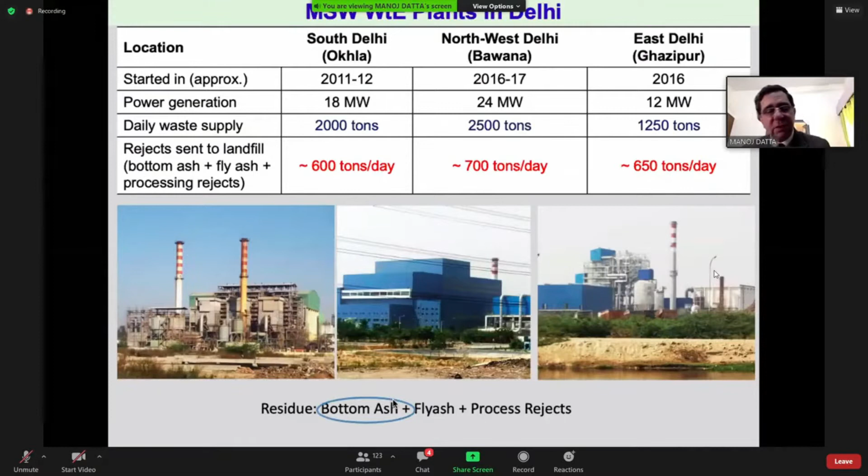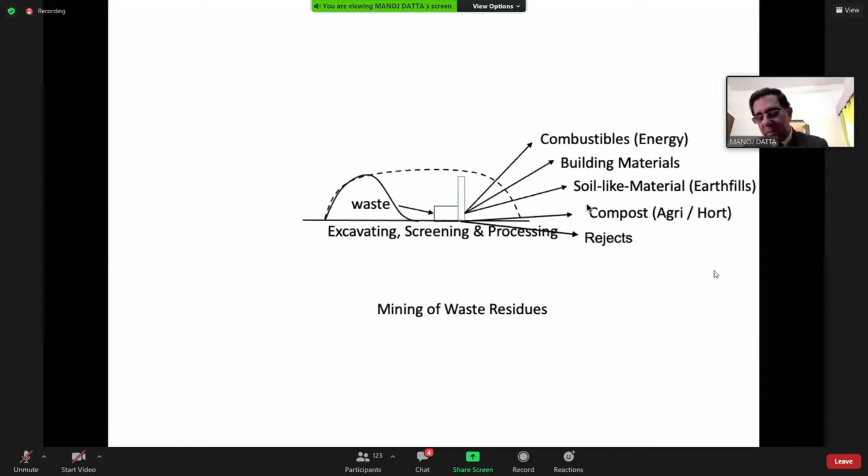The philosophy is that if you have a waste dump, and if you can excavate, screen and process the waste, you can recover combustibles, building materials, and rejects. So the focus in geotechnical engineering is, can I use the soil-like material for the purpose of earth filling? So bulk reuse of soil-like material as well as the waste-to-energy ash, which is now coming out in huge quantities, is the focus of this paper.

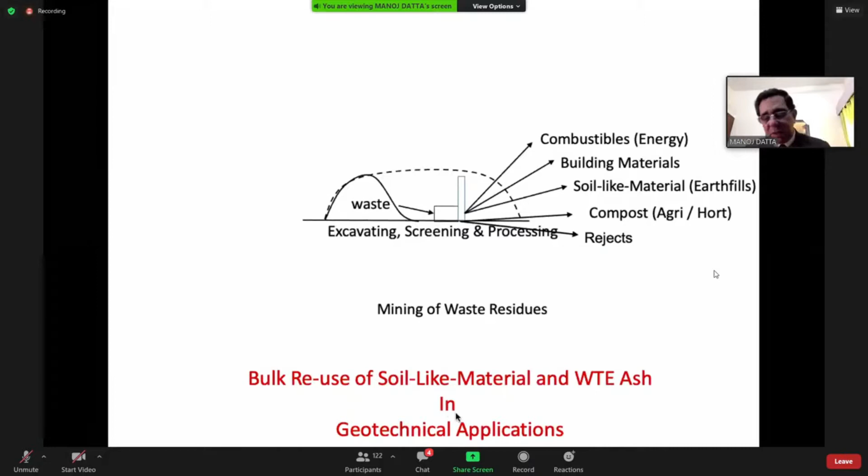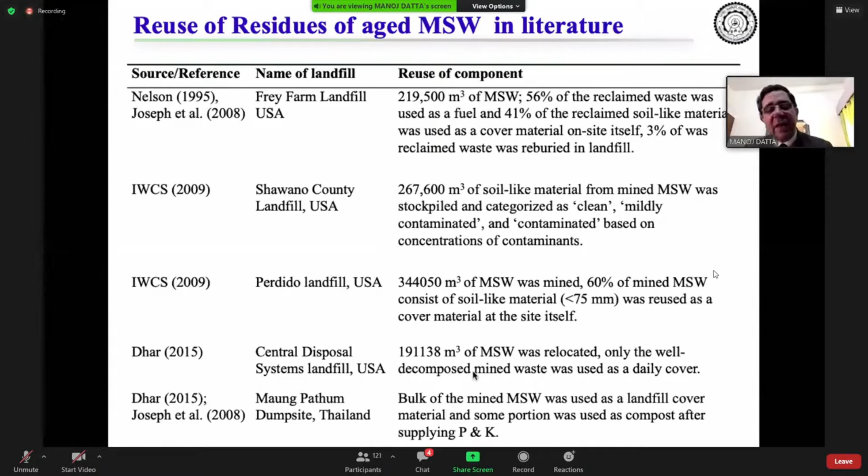First, we will look at soil-like materials. And what we find is that if you look at the literature, most of the soil-like materials which have been excavated and segregated have been used at the landfill site itself for the purpose of a daily cover or the final cover of the landfill.

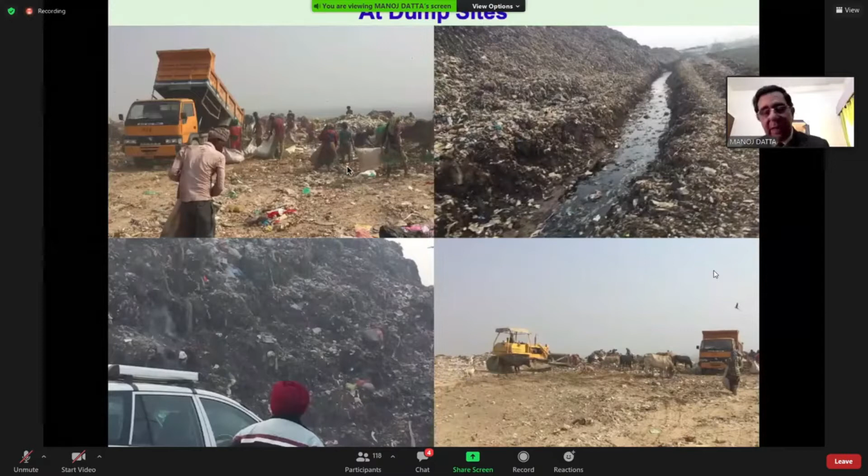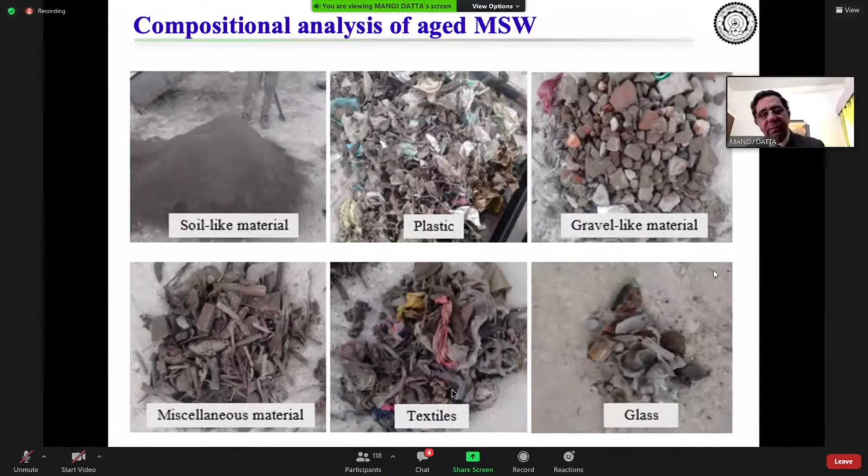So what we did was we collected waste from all three dumps and screened it, and looked at their visual composition. Bulk of the material is soil-like, some of it was gravel-like, and other minor components. If you look at the material passing 20 mm, 72 to 77% is soil-like or fine gravel. About 18% is C&D waste, which is greater than 20 mm, and the other things, combustibles and others, are in smaller quantity.

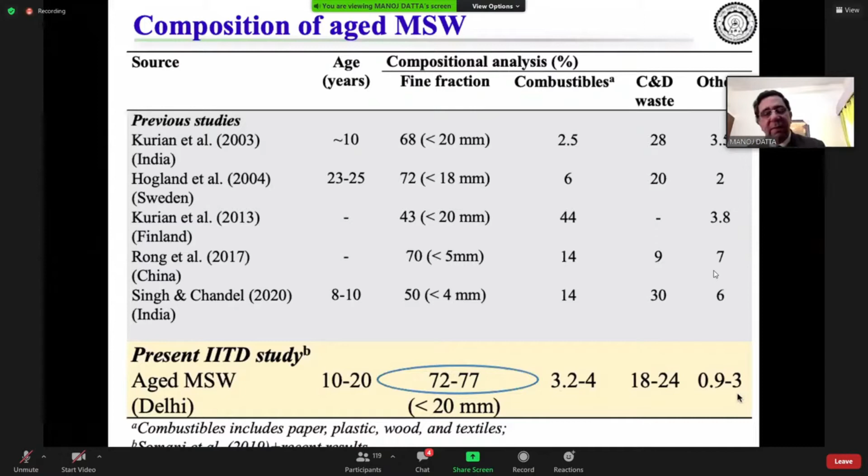And if I do a proper grain size distribution - that means washing to determine the amount of fines - then what we see is that 45 to 50% is in the sand size range, and 20% and above are in the silt plus clay size range.

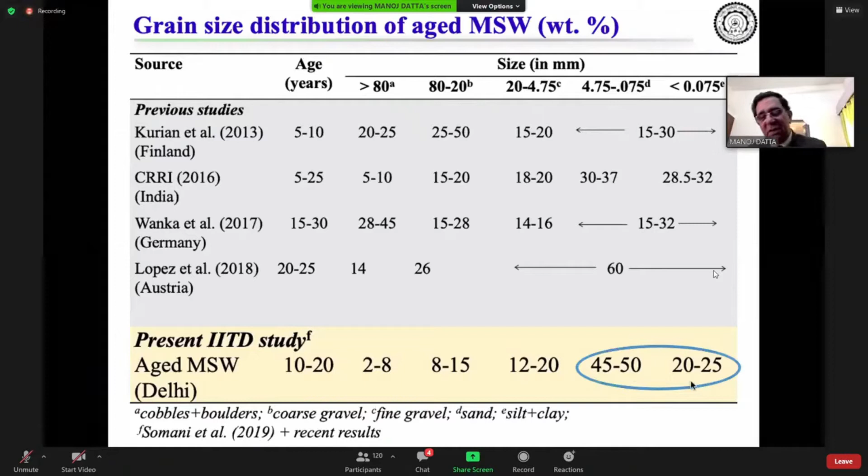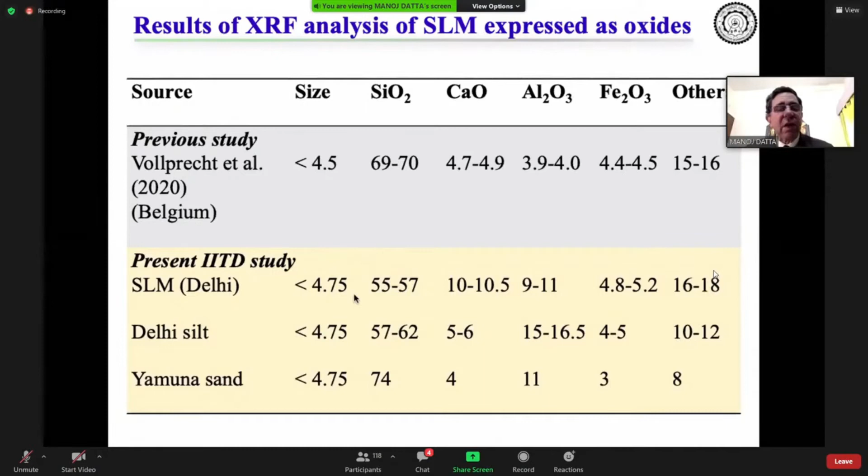And if I look at the major minerals - we are not trying to find all the minerals because the soil-like material is quite heterogeneous - what stands out from the soil-like material is quartz, calcite, and feldspar. And if I do the XRF studies, this is reinforced: you get SiO2 in large quantities, CaO, Al2O3, and Fe2O3.

As far as the C&D waste is concerned, it can be sent to the building materials waste processing unit, which is shown here. And as far as the plastics and textiles are concerned, they can be sent to the waste to energy plant.

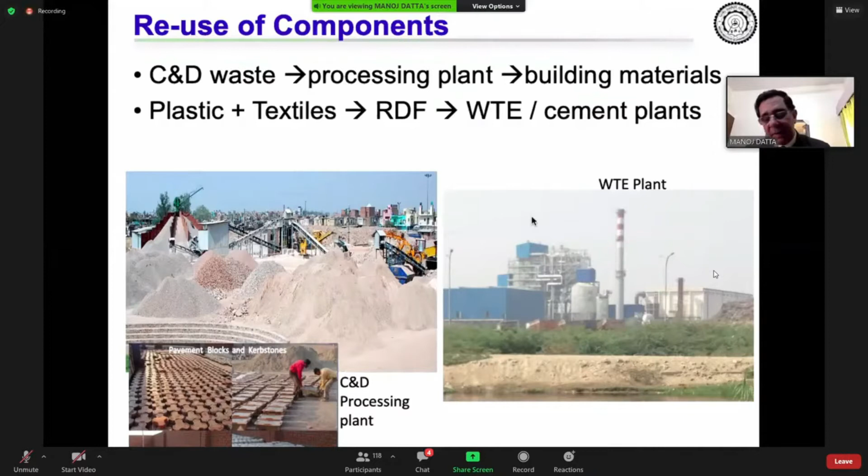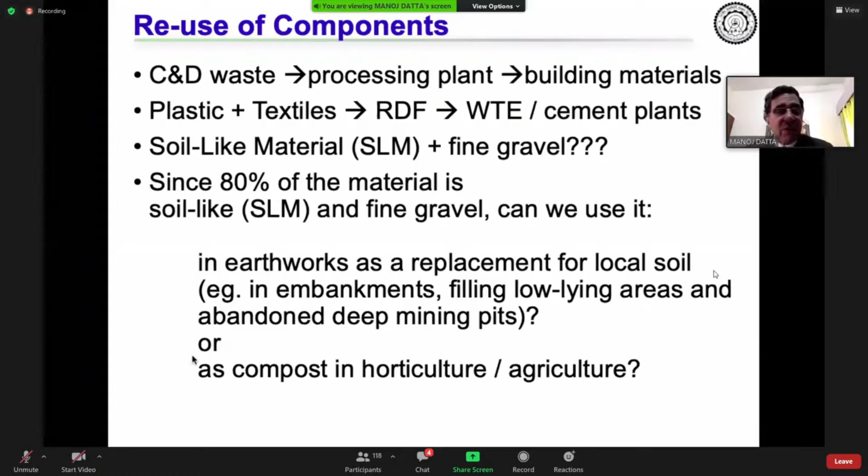But that still leaves us with about 80% material which is soil-like. So really the problem is not taking out the C&D waste and plastics and textiles, but to see what do we do with the 80% material. It is very attractive to say, can we use it in earthworks as a replacement for local soil? Or can we use it as compost in horticulture and agriculture?

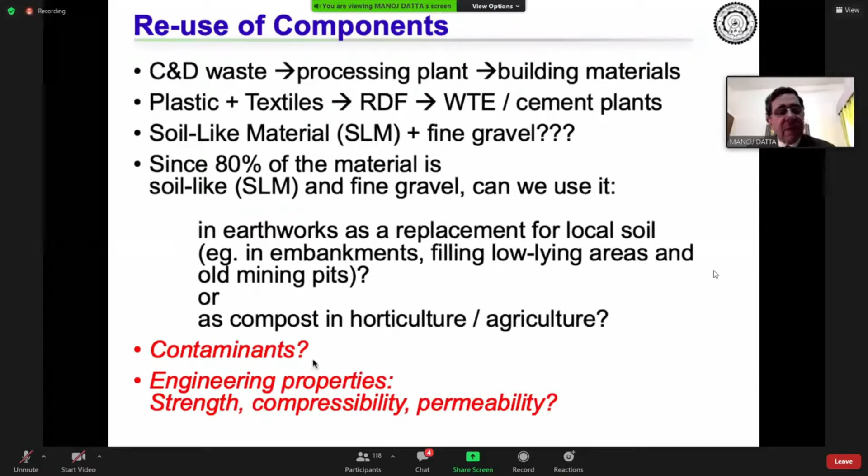So the immediate question which comes to our mind is, are there contaminants in it? And what are the engineering properties?

So the first question we'd like to address is: is the soil-like material hazardous? If you do the TCLP test, these are the results of the previous studies. Let me see if I can use the pointer better.

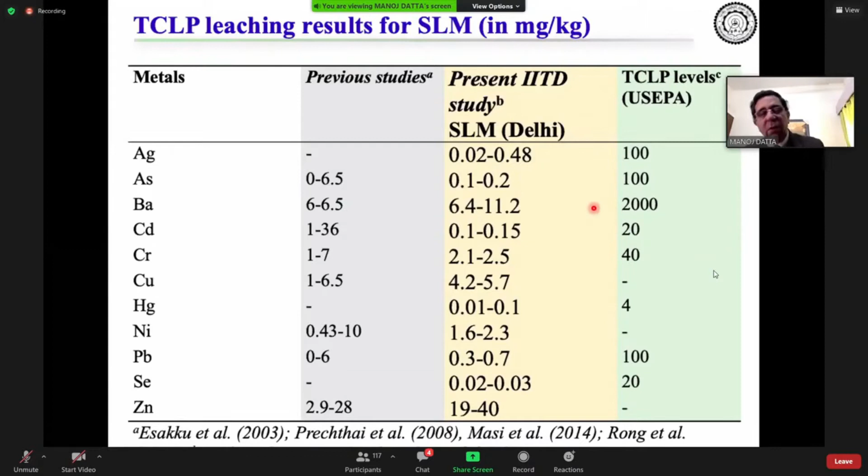These are the results of our current studies. It shows that almost all the heavy metals which come out are below the TCLP limits. So therefore, the statement which comes out in all the tests that is being done is that the soil-like material is not hazardous.

These mountains have 77% of soil-like material. Where has it come from? It has come in with the municipal solid waste, but quite clearly the silica matrix or the quartz matrix is coming in from the local soil.

So is the soil-like material similar to the local soil? That was our next attempt. What we find is that the soil-like material from these old waste dumps, which are 10 to 20 years old, the organic content is now 6 to 18%, but still substantial.

So we would like to recognize that when the MSW is put in these landfills, it probably has about 35 to 45% organic content and a lot more construction and demolition debris and soil, etc.

When you compare it with the local soil—when I am using local soil for Delhi, we are looking at Delhi silt and Yamuna sand—the organic content is 1 to 1.2. And if I want to use this material for the purpose of earth fills, the regulatory limits are mostly that organic content should be between 1 to 5% at max.

The other major difference is that the total soluble solids in the soil-like materials are very high. So I just want people to get an idea: this is 1.4 to 2%. The local soil has very little soluble solids, and these are primarily sulfates and chlorides.

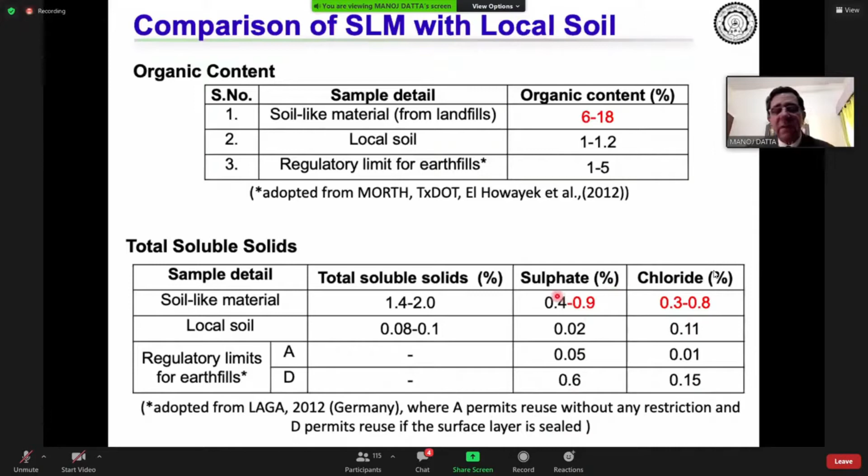There are some standards in Germany which say whether materials can be used without any restrictions or if they have to be used with sealing. So our chlorides and sulfates prevent unrestricted use of this material.

And if you pass water through the soil-like material—I would like to show you, this is silt, and we have transparent water, the silt has settled down. But if you pass water through all the 3 landfill materials, you will get this kind of water. So it releases color, and it is not that with one washing the color goes away. If I wash the soil 10 times with 10 times the volume, the color still comes out.

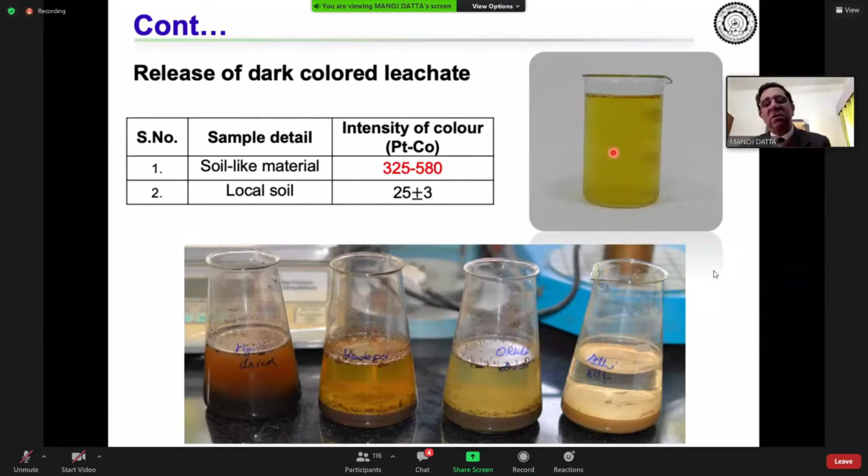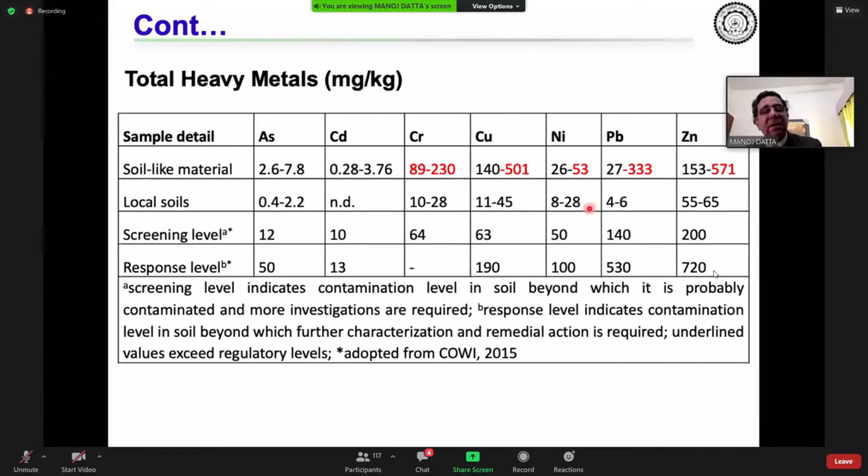And if I look at total heavy metals, though the material is not classified as hazardous as per TCLP procedures, chromium is elevated, 89 versus 10. Copper is elevated, nickel is elevated, lead is elevated. So really, while it's not hazardous, both the total heavy metals—which means we digest the entire solid matrix—as well as the leachable heavy metals, which is in water, are high.

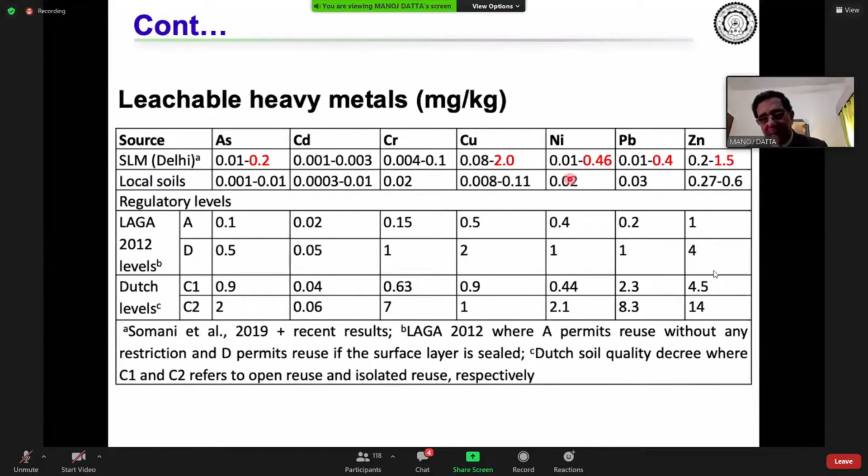So soil-like material is not similar to local soil either. It has higher organic content, higher total heavy metals and leachable heavy metals, very high soluble salts, and of course, leachable color.

Then is soil similar to compost? Because many people say that maybe we are looking at it wrongly. It has got high organic content, and from municipal solid waste by aerobic composting we get compost, and this is an anaerobic process, so maybe we can get compost. The only problem is that if the composting is done of mixed waste, you do get metals in it.

So we try to see this as well, and we find that the soil-like material—these are the compost standards of India.

How much organic carbon, total nitrogen, total phosphorus, and total potassium should be there. And we find that organic carbon is a little low. NPK is about all right.

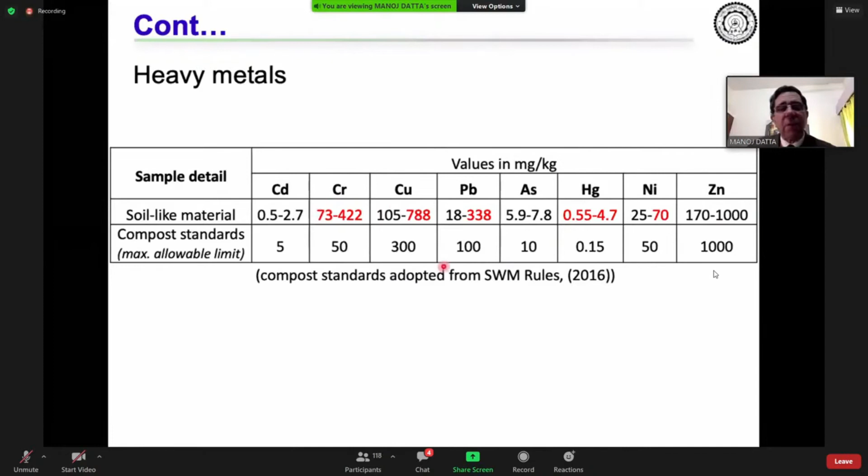But when we compare the compost standards as per our solid waste management rules on heavy metals, we again have the same problem. Chromium shows up, copper, lead, even mercury and nickel are showing up higher than what is prescribed.

So SLM is not similar to compost. It has lower organic content and higher total heavy metals in comparison to compost. So this is an important slide.

Soil-like material is not hazardous, so everybody is calling it inert. But the soil-like material is not similar to local soil. Soil-like material is not similar to compost. It is being erroneously labeled as inert.

Now, soil-like material is not inert, but can be classified as non-hazardous material, which is what we call municipal solid waste, from which contaminants do come out.

And the soil-like material does not meet international guidelines. We have no national guidelines for this, for direct application or unrestricted use on land as earthfill or as compost. This is what we are finding.

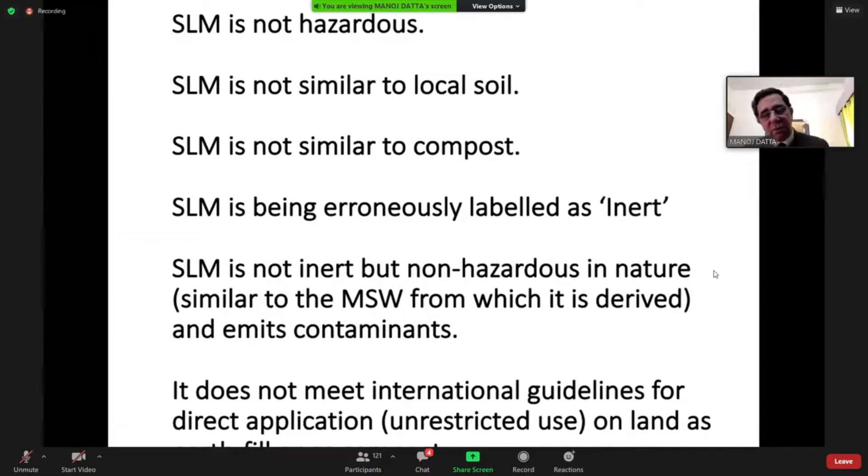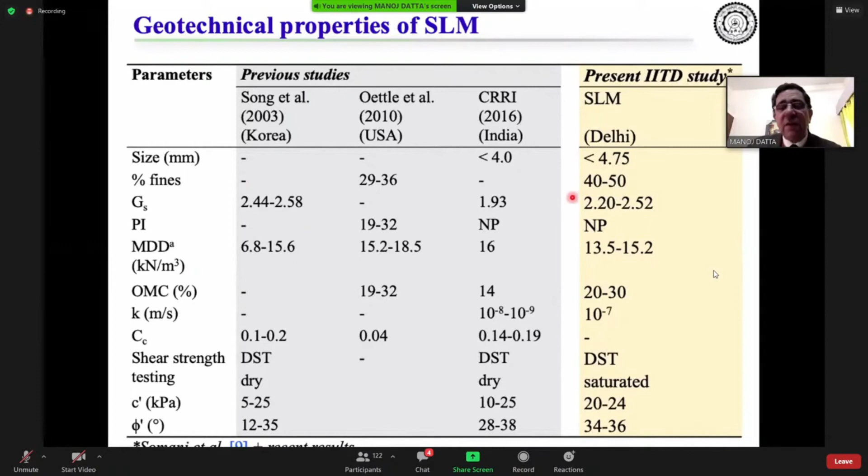The material has reasonable shear strength, but the shear strength can be low if the organic content is very high. That is the study, I think, of an earlier group of Song et al., which showed pretty low phi dash values.

But in our material, that was not so. It has low permeability. And because of its organic content, it is expected to have time-dependent long-term settlements.

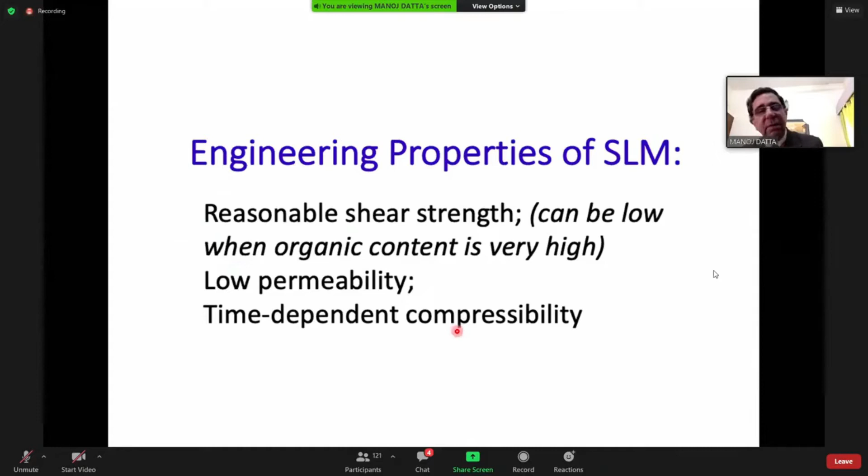So having looked at the soil-like material, we now start to look at bottom ash. Now, and we have to understand what is happening. Everybody is sending the municipal solid waste to these waste-to-energy plants. And if you send in 2,000 tons...

...into the waste-to-energy plant, this is the Bawana plant. And if you look at the mass balance, let's not go into the processing. Some material goes for composting, some goes to RDF and the waste-to-energy plant. We get about 570 tons of material outside of the plant. So that's going back to the landfills.

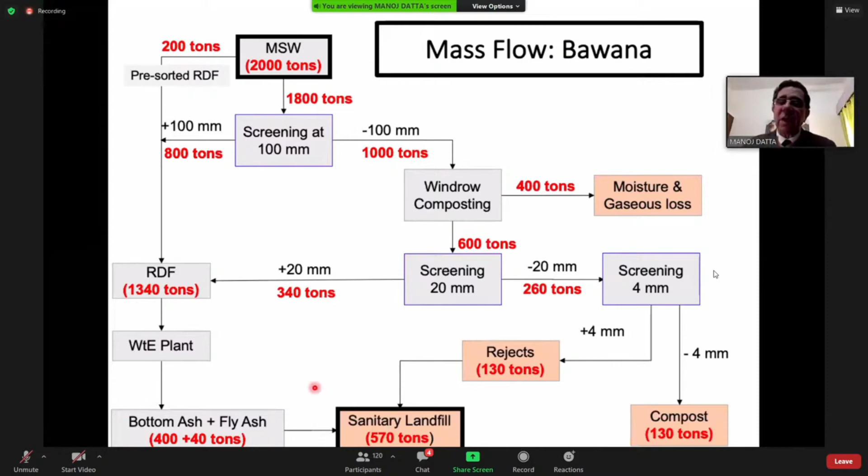So while we are reducing the amount of waste which is coming, we are still getting this waste to energy ash. And it looks like a perfectly nicely burnt material.

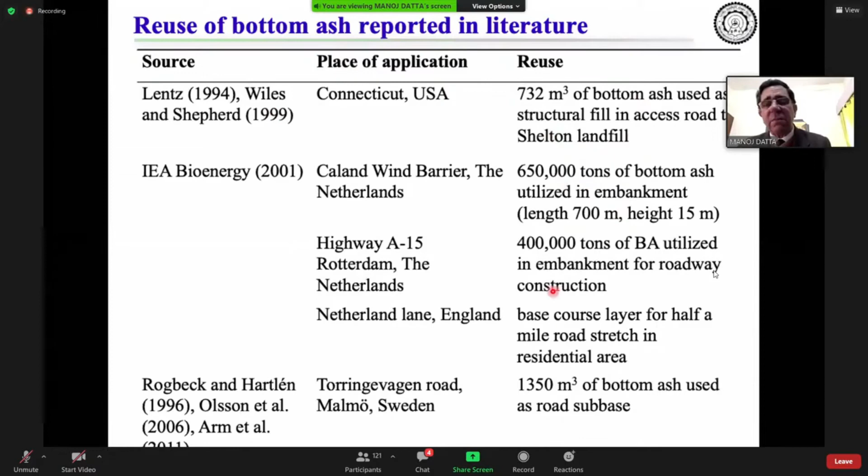And we looked at the reported, can we reuse this in earthfills? That's a bulk reuse. So there are enough evidence of this having been used in embankments or structural fills beneath the roads. So is there something to be bothered about?

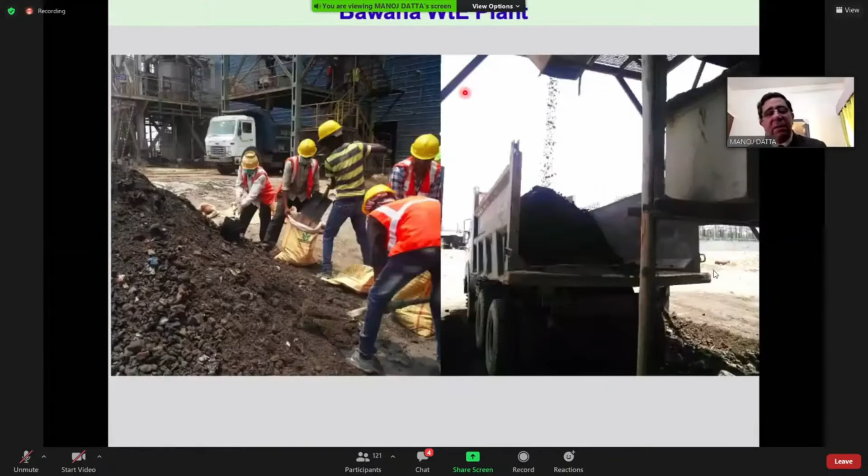So this is the bottom ash from the Okhla waste-to-energy plant. This is the bottom ash from the Bawana plant. And these are all going back to the landfill. So this is a truck full of the ash coming to a landfill from which we have taken samples.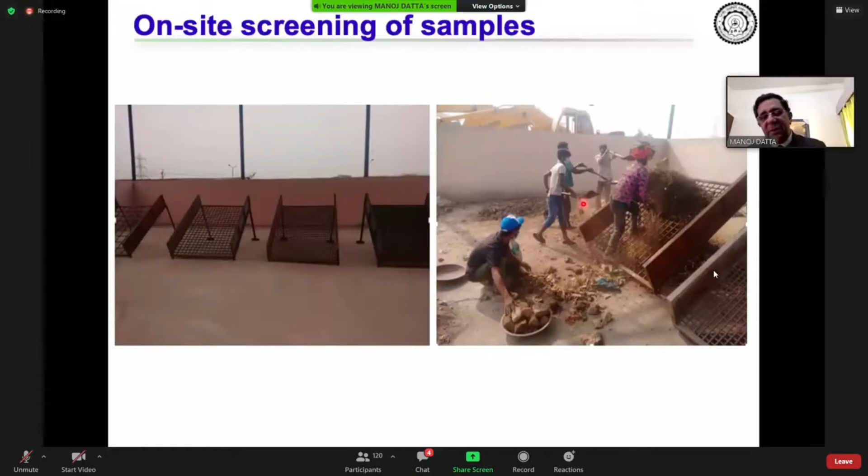We did exactly the same thing with the waste-to-energy plant waste, as we did with the soil-like material. We've segregated it on site manually, and we found all these fractions. Now, again, you will see a soil-like fraction, and you'll see the C&D and the slag and the stones.

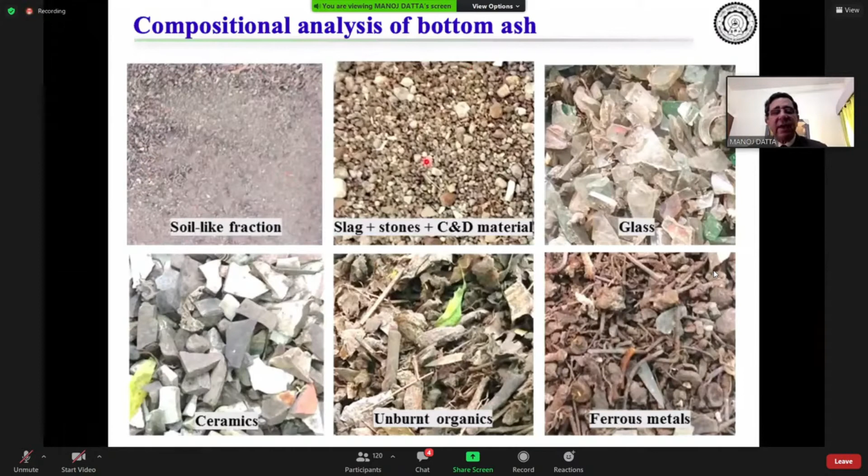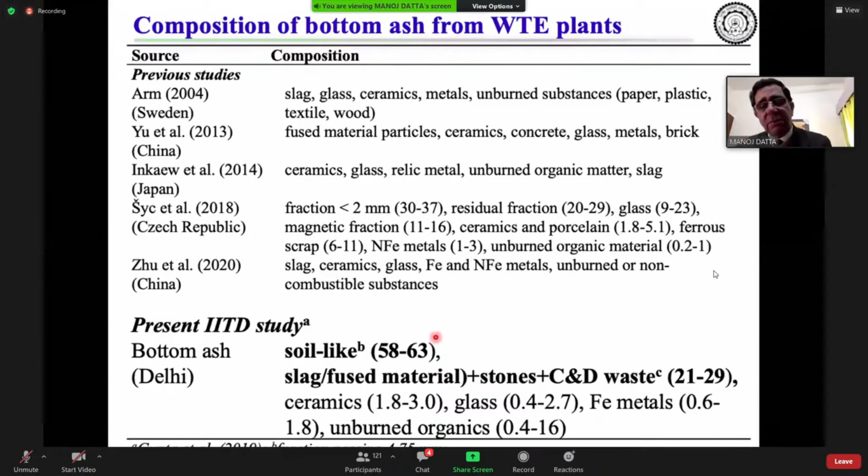And if you really want to see how much is the soil-like fraction, in this case, it is from the Delhi plants, it's about 58 to 63%, and this is about 21 to 29%. And really what we are talking about is that how can we use this?

The C&D fraction can go to the building materials plant. But what do we do about the soil-like fraction, which is about 50, 60, 70%?

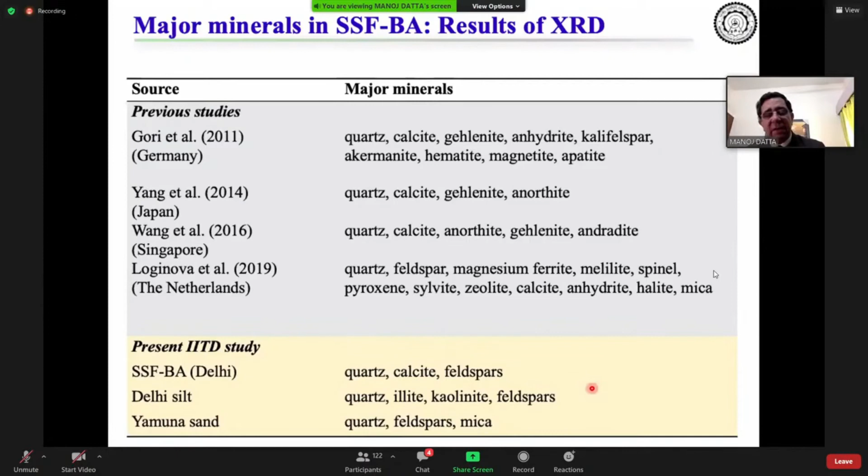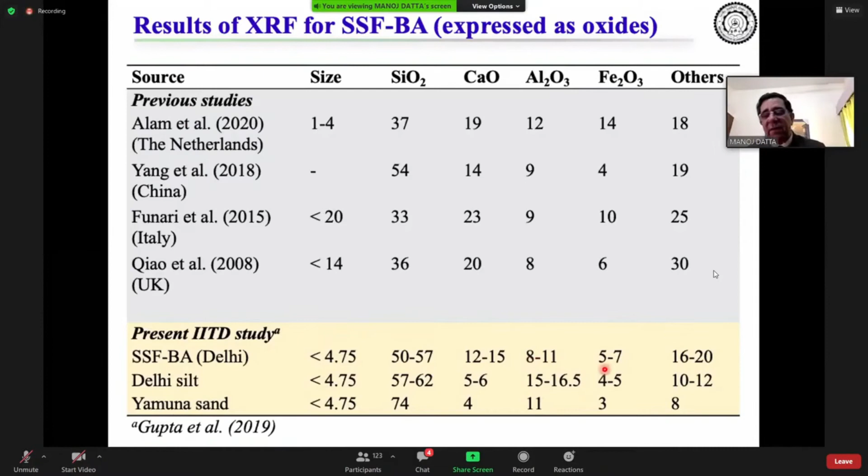And again, we are looking at the bottom ash has the same minerals, quartz, calcite, feldspars, and others. And it has same SiO2, 50 to 57%, CaO, 12 to 15, alumina oxide, 8 to 11, and ferrous oxide at 5 to 7. So the first question, is bottom ash hazardous?

We do the TCLP test, and so there is some feeling that when you burn the municipal solid waste and it's a mixed burn, it's not a sorted burn. So if it's a mixed burn, that all the heavy metals will sort of get, some of them will go into the gaseous state and come back as leachable heavy metals, and it's deposited on

the solid matrix. But there is no major accumulation of the heavy metals in the bottom ash. So we did find there is accumulation in the fly ash, and those results we are not presenting here.

That's the finer fraction, but there is no significant accumulation of the metals in the bottom ash. So bottom ash is not hazardous. That's very good for us. So we can reuse it.

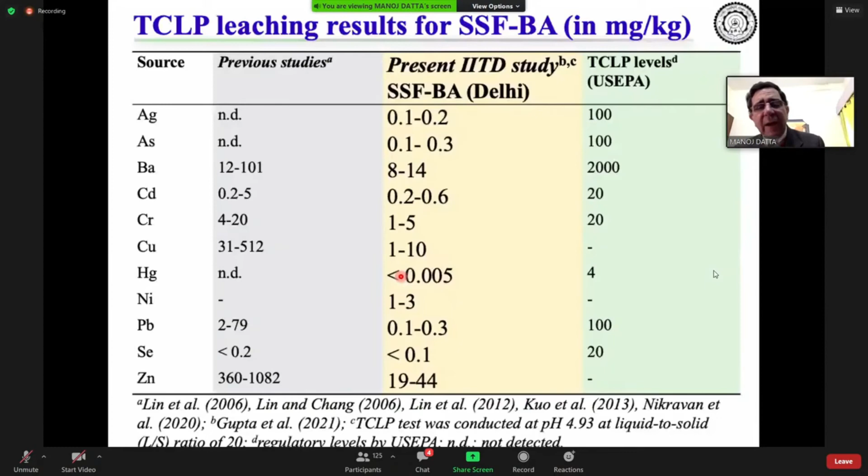Since it has gone through a process of incineration, one would expect all the organics have burnt out because the temperatures in the furnaces are very high. So the question is, is bottom ash similar to local soil? I'd like to go back to the grain size distribution slide here. I don't know whether I missed it.

Firstly, the organic content. For whatever reasons, because we are doing mass burn and our waste is not well segregated, there are lumps of soil also which go into the furnaces. So when there are lumps of soil, and if you're having a low residence time, you can have situations where all organics will not burn out. So you're getting high organics, very high total soluble solids.

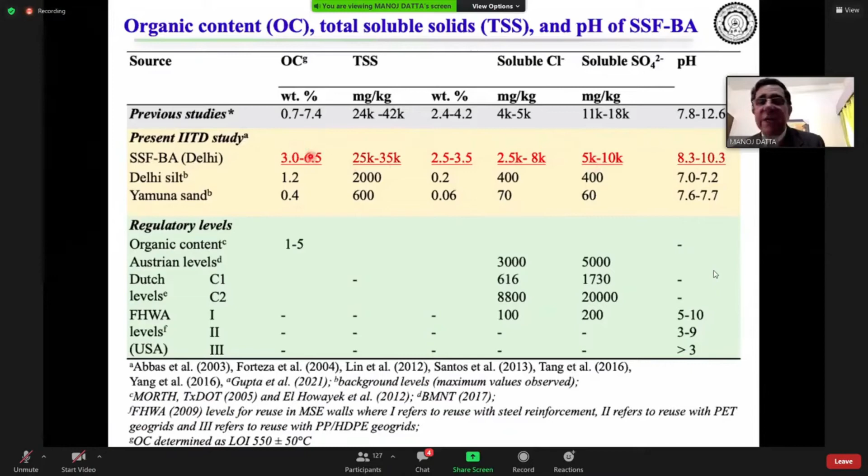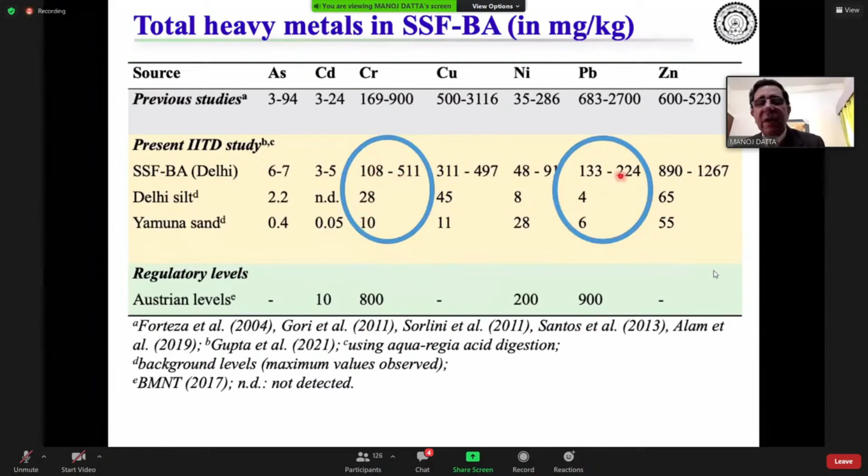So bottom ash is not similar to local soil. It has high organic content, total heavy metals and leachable heavy metals, and very high soluble salts in comparison to local soils. Another characteristic I didn't highlight is that its pH is also in the higher range, which sometimes affects the use of polyester geosynthetics.

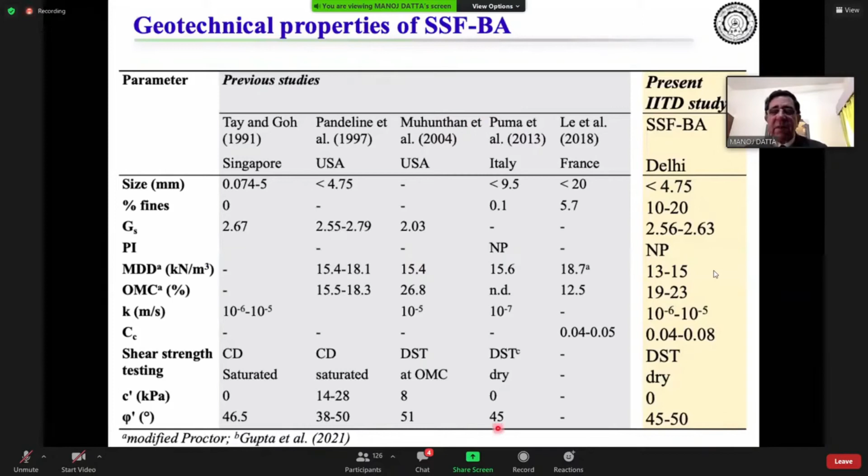So what about the engineering properties of bottom ash? Now, these are good. You can get very good shear strength parameters, low compressibility parameters, and medium range permeability. So it's good shear strength, low compressibility, and mid-range permeability.

Now let's look at these two materials we have. One is the soil-like material emerging from the landfills, which is a residue that has come out of a bioreactor—an anaerobic bioreactor lying there for 10 to 25 years. The other is waste-to-energy ash, which has come out from a thermal treatment that is instantaneous—it just goes in, gets burnt, and comes out.

So the questions we are asking are: can we have unrestricted use? Or do we reuse it with sealing layers and isolating layers? Or do we reuse it with sealing layers, isolating layers, and even a leachate management system? Or should the other option be to go in for treatment?

Now, various kinds of treatments are under development: blending, immobilization, size separation, washing, carbonation, biological stabilization, and biocementation. These are under development, and we will not say much about this yet, but yes, for specific cases, these are applicable.

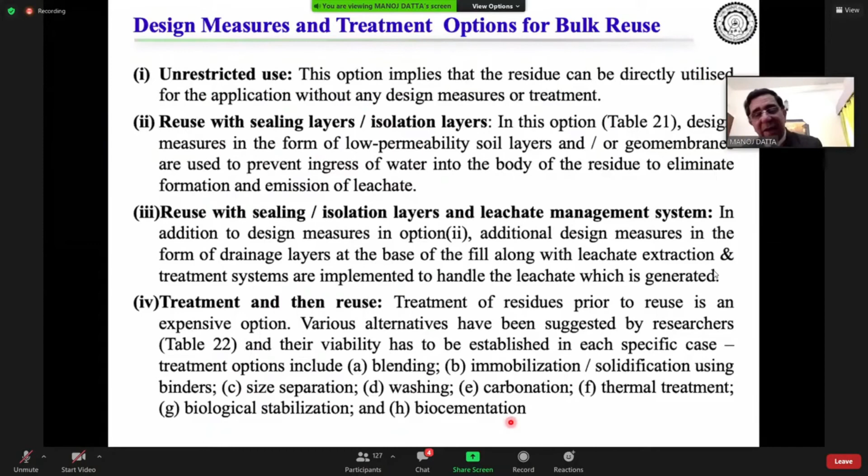And where can we use it in bulk reuse? Large area surface application for revegetation, soil conditioning, or ecoforestry. So if you have degraded land and we want to do ecoforestry or make it green, then the soil-like material appears to be very nice.

Similarly, can we use it for earth fills, for raising low-lying areas or for landscaping? In Delhi, there are many deep mining pits which are 20, 30 meters deep—can we close those pits? And finally, can we use it in embankments for roads, railways, and water retaining structures as a structural fill? And in the end, can we use it for structural backfill for mechanically stabilized earth walls?

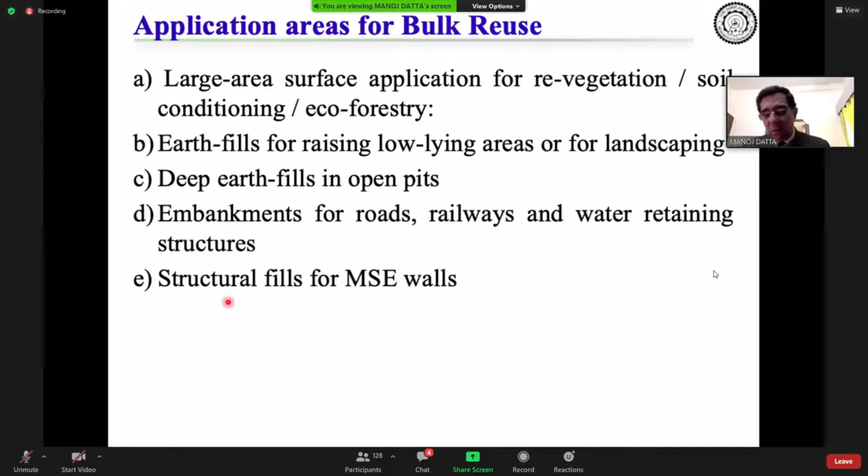So our findings suggest the following. Firstly, no unrestricted use. Secondly, if you are going to use it for revegetation and ecoforestry, you can use the soil-like material, but remember it has elevated heavy metals, and it can be blended with topsoil—we are only going to use a thin layer of this material. When we do revegetation, we are not putting a few meters of soil or tens of meters; we are just putting a very thin layer, less than about 50 centimeters. So if we blend it with topsoil, we are able to bring down certain contaminants, and we can use it because it has organic carbon and does support vegetation.

For earth fills, for raising low-lying areas or for landscaping, we think both SLM and BA can be used if they are non-structural earth fills, because SLM is going to undergo long-term settlements, but with sealing layers. For deep earth fills, like in 20, 30 meter deep pits, we can use this, but then leachate management is needed, because this material, SLM, is almost like municipal solid waste. It is giving out so many things, so we will have to recover the leachate, otherwise it will go down to the groundwater resources.

For embankments for roads, railways, and water retaining structures, bottom ash can be used, not soil-like material. It has got too much organic content. But bottom ash requires sealing layers because of too much salt in it, and we have to handle the leachate coming out. For structural fills, we may use bottom ash if we can treat it by aeration to reduce the pH.

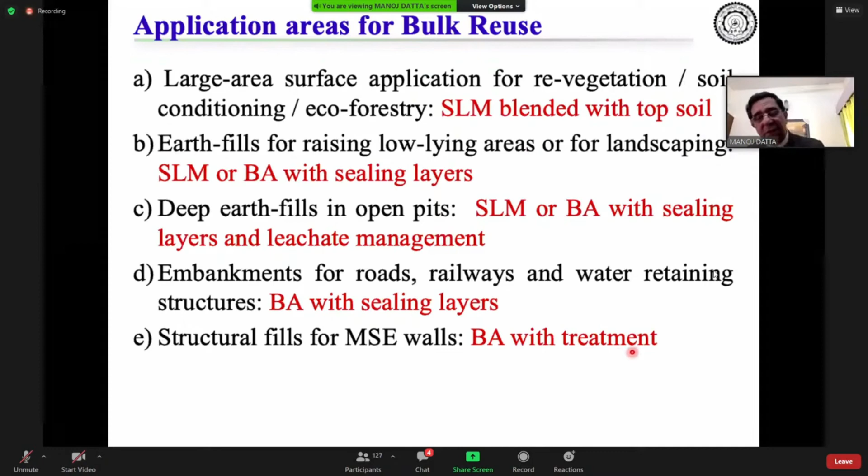So, concluding remarks: the level of contaminants, heavy metals, in municipal solid waste residues are not enough to classify them as hazardous. So people are calling this inert, but that's wrong. They exist at elevated levels. And I want to give you this simile, which I say very often.

We've spoiled the waterways of Delhi. Yamuna is invariably dirty, we cannot clean it up. We spoiled our air, we are now getting smog every winter no matter what we do. The only thing we have to be cautious about is we don't spoil our soil. And we can, if we indiscriminately start calling this material inert. So unrestricted use is not recommended.

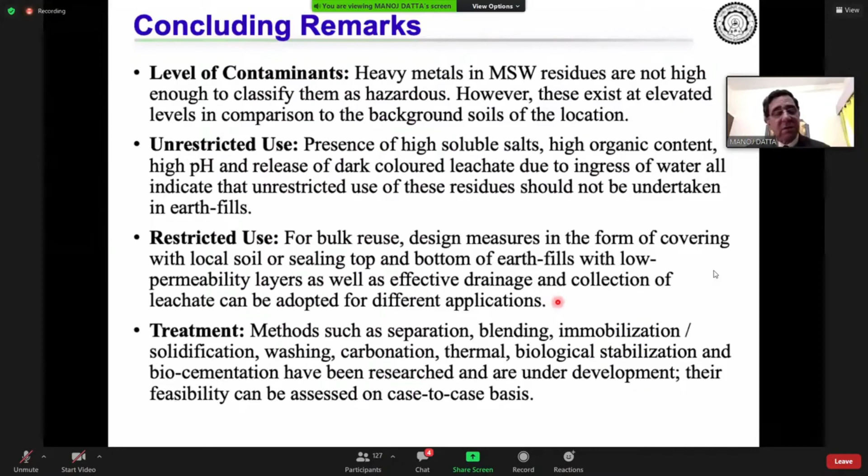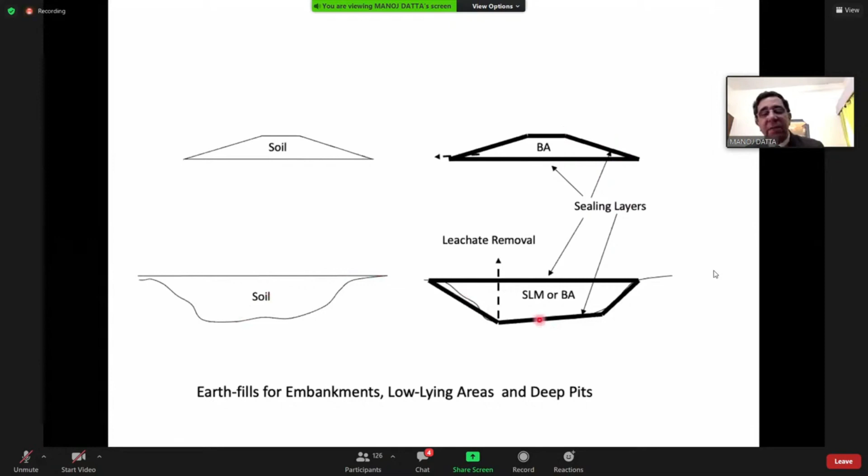Restricted use in the form of sealing layers, as well as for very deep applications of leachate, is recommended, and treatment methods can be tried on a case-to-case basis. So from here, we have to go here, and from here, we have to go here. And remember, when we are in a deep pit, we have to remove the leachate, otherwise you will get colored water going into your groundwater resources.

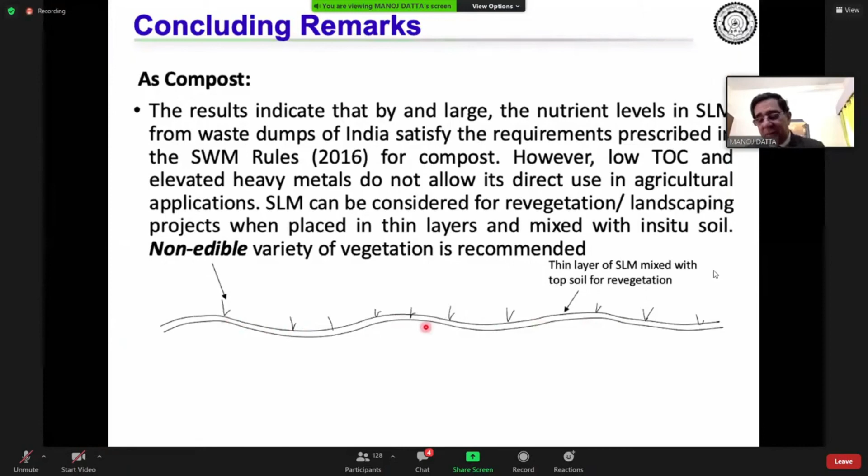As compost, as I said, you can blend it with the topsoil and use it for growing vegetation. Our experiment at the Okhla landfill does show that vegetation grows well. But that does not mean you can grow edible vegetation on it - it has to be non-edible vegetation.

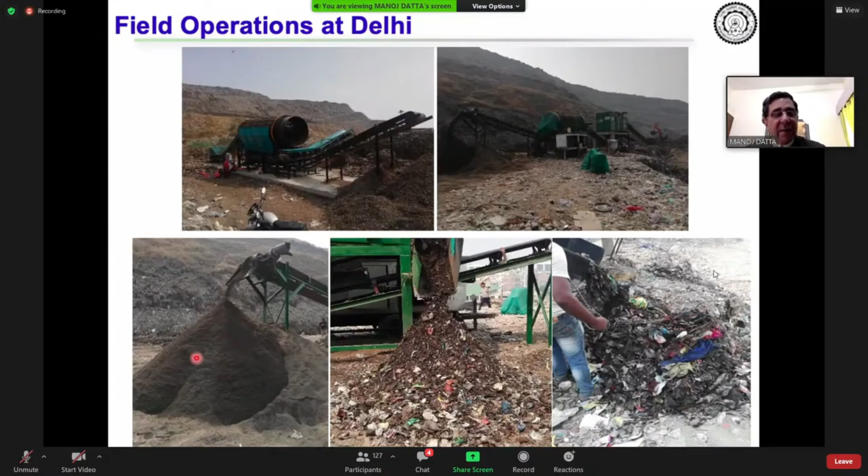And these are the field operations going on in Delhi for the purpose of separating these three fractions, 1, 2, and 3. This is a soil-like material - it looks very voluminous, but remember, this is about one-sixth or one-tenth of these two fractions. And this is the process: 10 trommels processing 2,000 tons per day will take 15 years to make one dump come down.

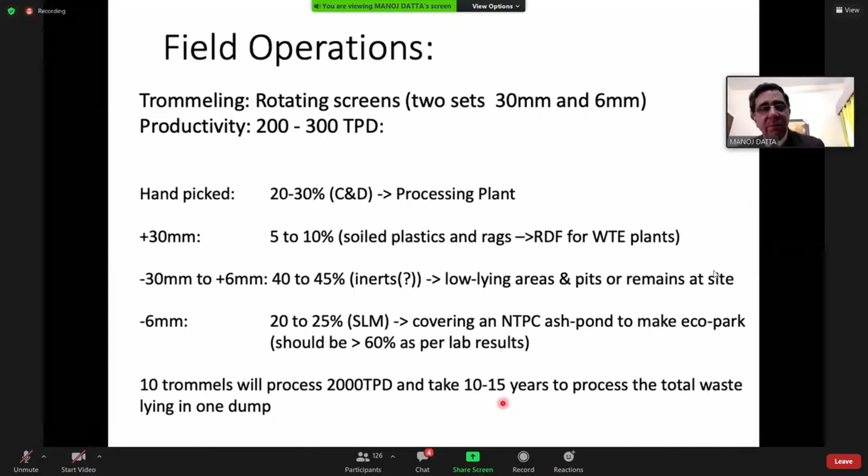But what am I worried about? There's a recent NGT order which has directed that all MSW dumps be mined. And this is leading to unrestricted spreading and earth filling. When we tell somebody that look, this material is not to be used, they say no, it's not hazardous - we are doing the TCLP test, and which is correct.

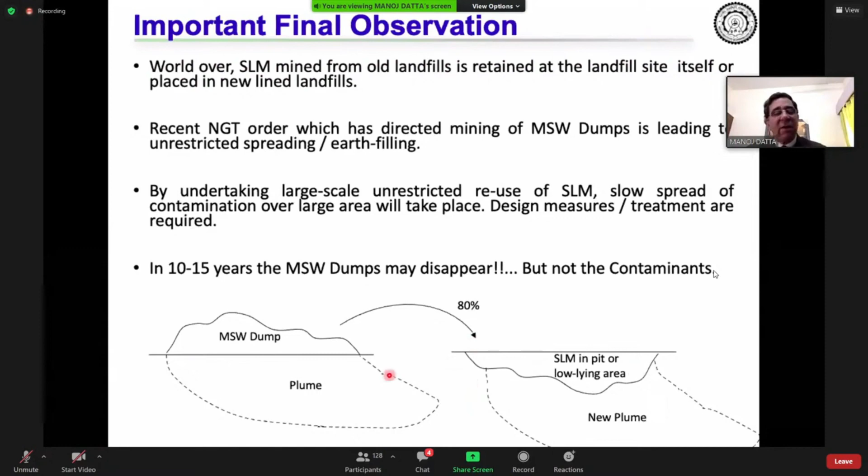By undertaking large-scale unrestricted reuse of SLM, slow spreading of the contamination is taking place. Nobody's putting any sealing layers. So in 10 to 15 years the dumps may disappear, but what's going to happen? If this dump goes into a deep pit, and this deep pit is not designed to remove any of the contaminants, all that we are doing is the old plume will remain, and we will create a new plume.

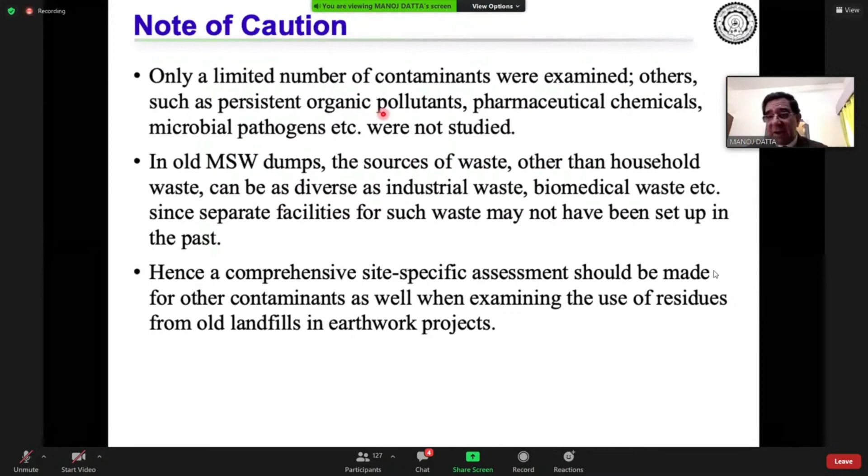So we have only studied a few contaminants. We are not chemists or biochemists. We have not done persistent organic compounds, we have not done pesticides - we have not looked into this material in great detail. We did some very basic study, but old municipal solid waste is so heterogeneous, because earlier there were no industrial waste landfills, so industrial waste also used to come into this. So we have to be very cautious about how we spread this.